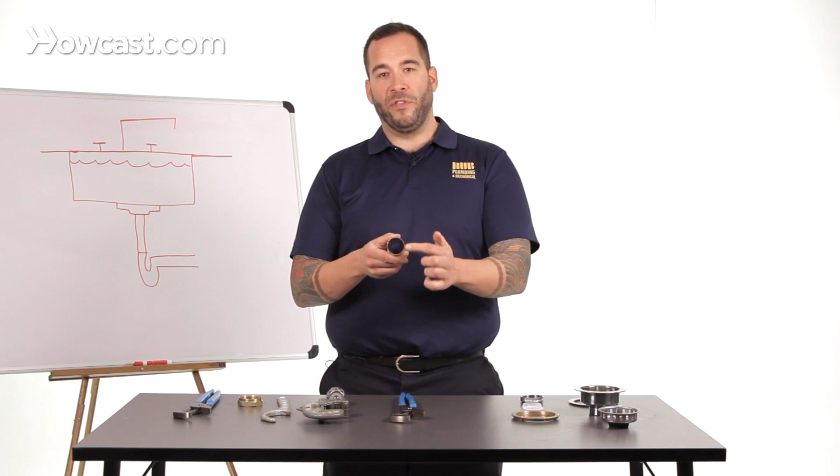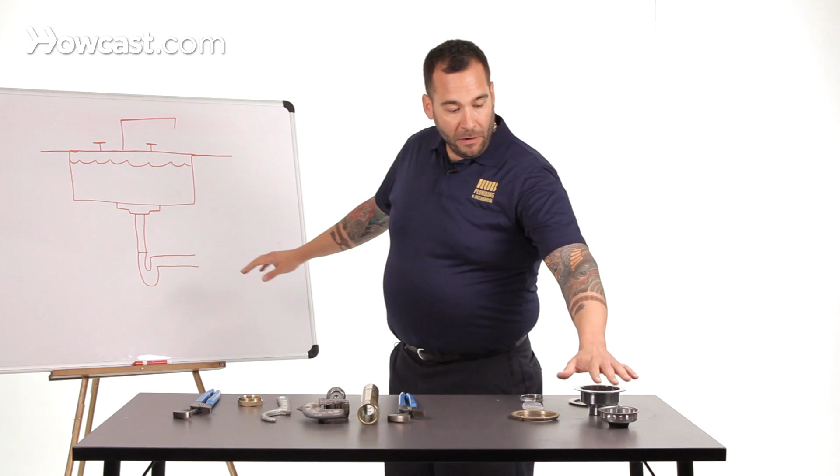This is called a tailpiece. In particular, this is a flanged tailpiece. You can see that flange, okay? Behind me is a sketch of a sink, all right? This item here is called a basket strainer. You've probably seen this in your own sink. This is the stopper that you use that catches all the food.

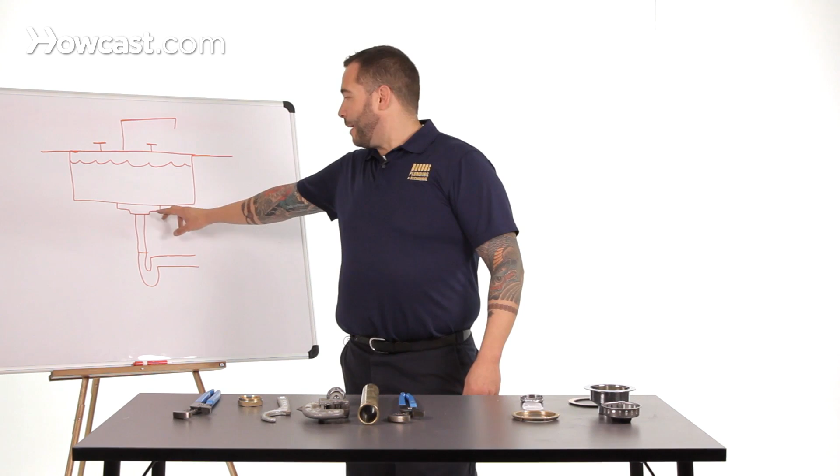And below that is the part that's permanently affixed to your sink, okay? This is the basket strainer itself. So for our purposes today, I've illustrated the basket strainer here, okay? This is the basket strainer, this assembly right here. And this, right there, is the tailpiece, okay?

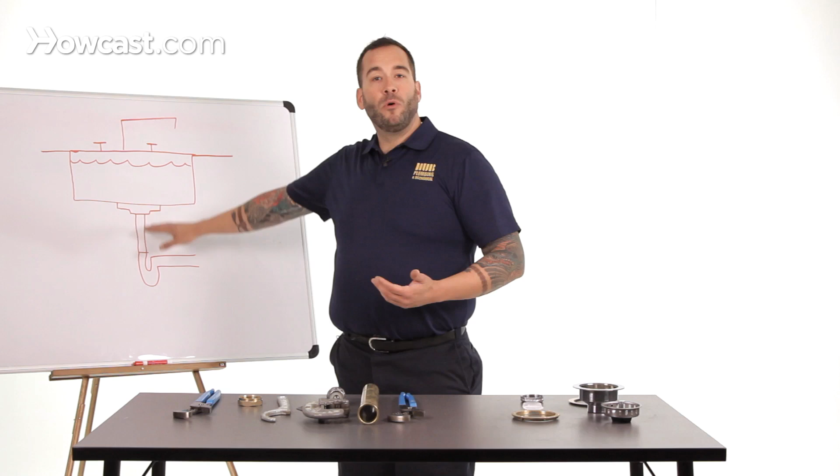So when you get a leak below your kitchen sink, you all of a sudden open the cabinets one day and there's water below. Most likely, this or some portion thereof has rotted out, cracked, decayed. It's time for it to go.

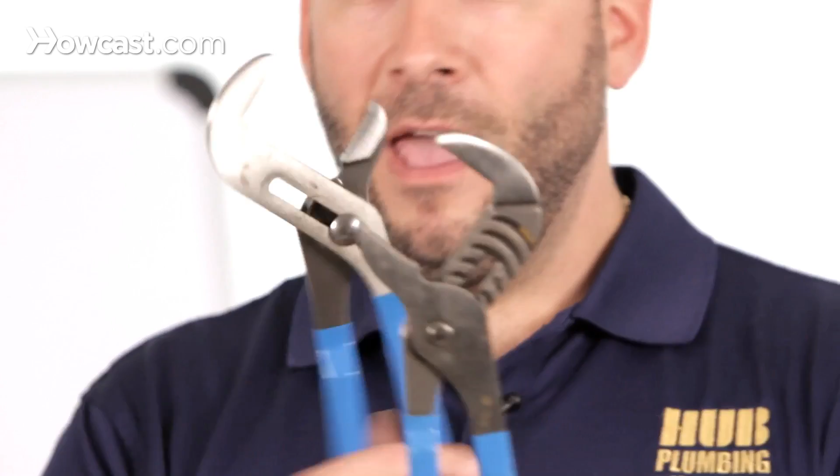So you need a few tools to get this done, okay? Once again, our channel locks. This time we want them with the teeth, okay? The reason I have two pair is so that in case I need to hold back, I can turn like so and gain torque that way. I'll demonstrate that in a moment.

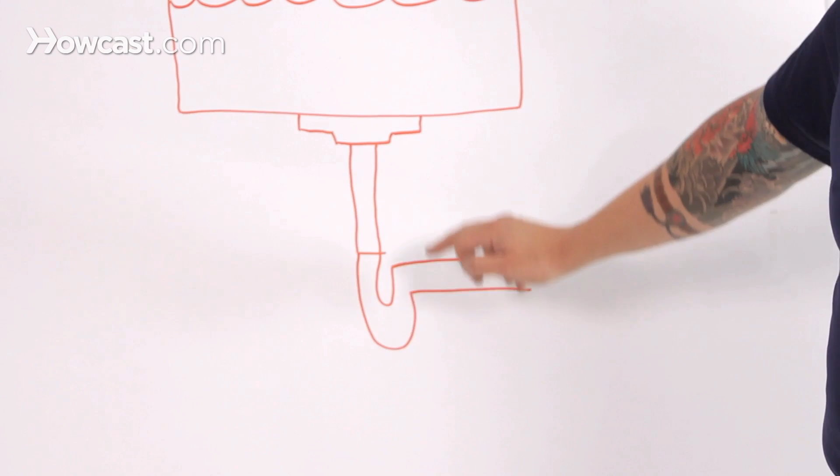The trap is that U-shaped piece of pipe right there under every kitchen sink, and if it's not under your sink, it should be under there because somebody did something wrong. The purpose of the trap is to keep water in that U, to trap everything in the sewer out in the sewer, things like flies, bad smells, and more dangerously, sewer gas.

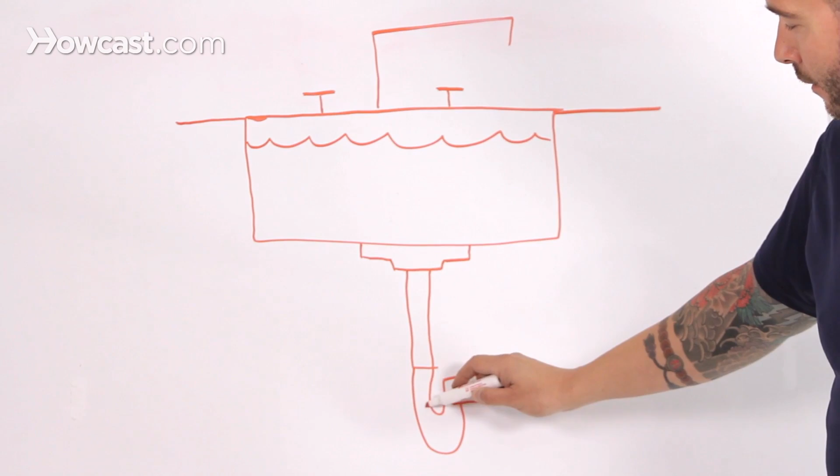Okay, so imagine the water level in the trap would be sitting right here. So when water goes down from the sink, it goes out into the drain and out into the sewer, but that little U-shaped piece of pipe, the trap, keeps a little bit of water there to keep everything on this side of it, okay, the street side we call it, out there.

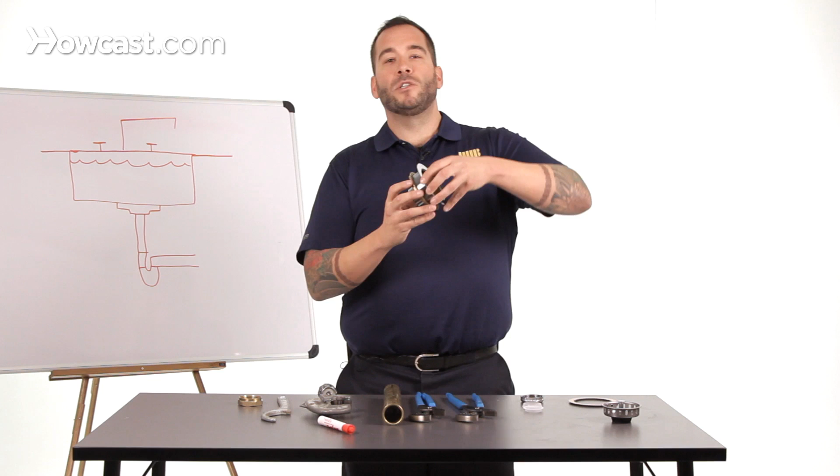Now, when removing a basket strainer from an existing sink, it can kind of get hairy. So imagine this basket strainer living in there for, I don't know, 15, 20 years. So we've got the nut that holds the assembly onto the sink like so, okay? With time, that nut can fuse on, and it gets really, really difficult to remove. So the only caveat there, you might have to hire a plumber, because we need to get in there with a saw and cut it out, and it can be a nightmare.

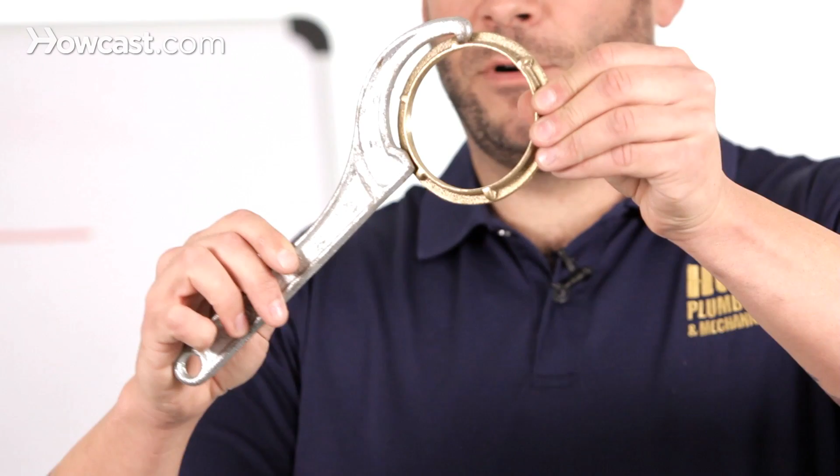If it's not, and most of them aren't, you can use this tool here. There's no other purpose for this tool in the world other than that brass nut on the bottom of the basket strainer. It is designed solely for this brass nut. It fits on like so. See the little nubs on that nut? It grabs perfectly, and you can turn that nut like this, okay?

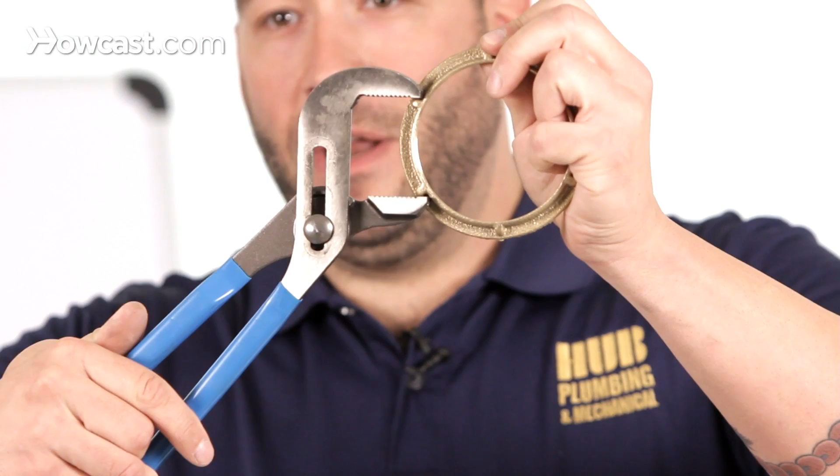This is essential. A lot of plumbers or homeowners, you can get the job done with the channel locks, but what you have to do, and it's a pain, is grab those two nubs, and then you get what I call the Knuckle Buster. It slips, boom, and you smash your knuckles between the channel locks, and then the next thing you do is throw them behind you, probably hit your wife or husband or whoever's behind you, and we have a bad day. So have the right tools for the job.

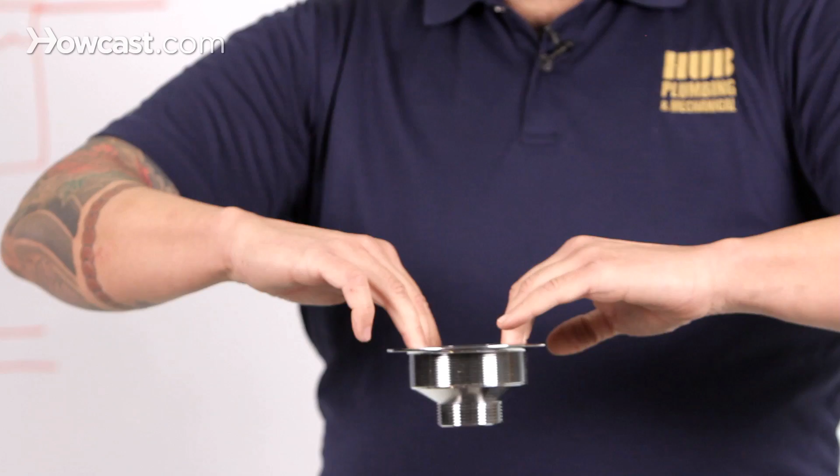Let's say we've got the basket strainer out, and now we're looking at a kitchen sink that's just a steel sink, and there's a hole there. What you're going to do is take this piece here, this collar, as we call it, put a roll of putty around that collar, and smush it down into the sink. That putty is going to kind of keep it there. Okay, now, our head would be up here above the countertop.

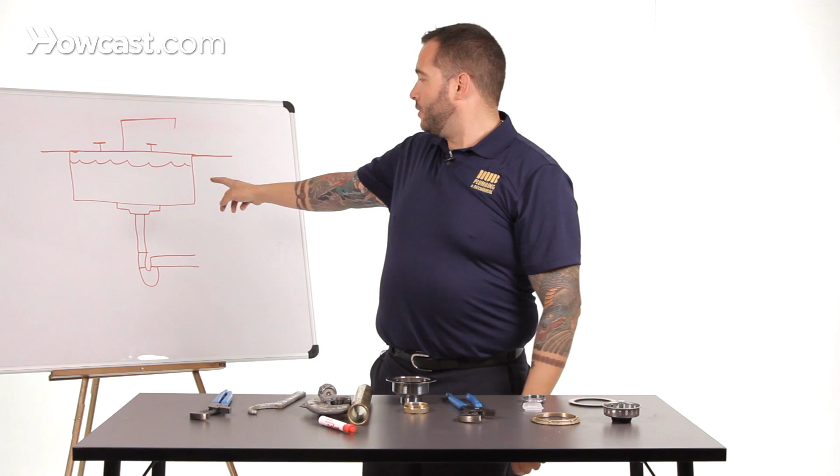We're going to go beneath. What you're going to see are these threads here, okay? If I'm going to refer to my drawing, now we've got this collar stuck down into the sink, and we see these threads down here. Now we can concentrate on putting the basket strainer assembly together.

So from under the sink, we're looking at these threads. Your drainage assembly will come with these two gaskets. One is a cardboard gasket. The other is a rubber gasket. The rubber gasket is what makes a watertight seal. The cardboard simply kind of holds it in place. So you would, again, looking at these threads underneath, put these up like so.

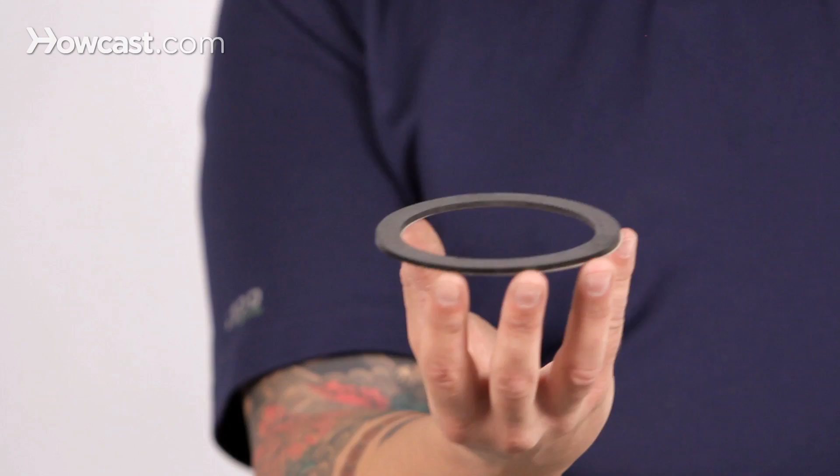Then you're going to take your brass nut, this wide brass nut, this retaining nut. You thread the brass nut on. You can do this by hand for a while, and then you're going to get down to the business end of things, and you're going to start building up torque, okay? When you start building up torque and you can no longer turn it with your hand,

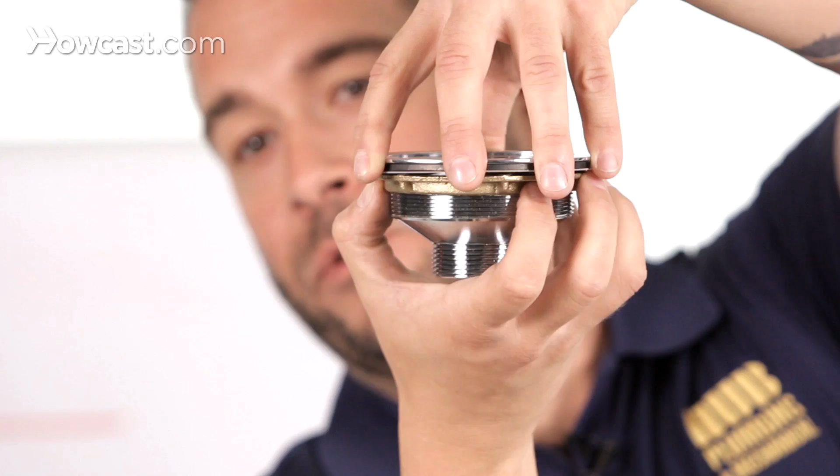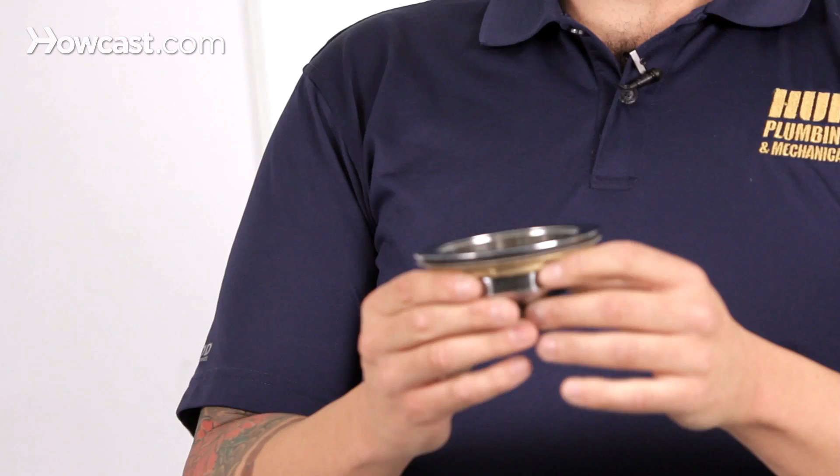you get on it with this strainer nut wrench, and with quick jerky movements, I'm going to turn to the side so you can see. This would be you looking underneath the sink straight up, okay? You kind of get on it, turn, and it's going to build up torque, and you're going to be able to feel this whole assembly kind of snug down to the sink, okay? Again, with the steel of the sink being between these gaskets and this top chrome collar piece.

All right, very simple, very, very simple. You can save yourself a lot of money by doing this yourself. So now we've got our basket strainer assembly on the sink. It's solid, it's in place, okay? Now this is all brand new, there's nothing leaking.

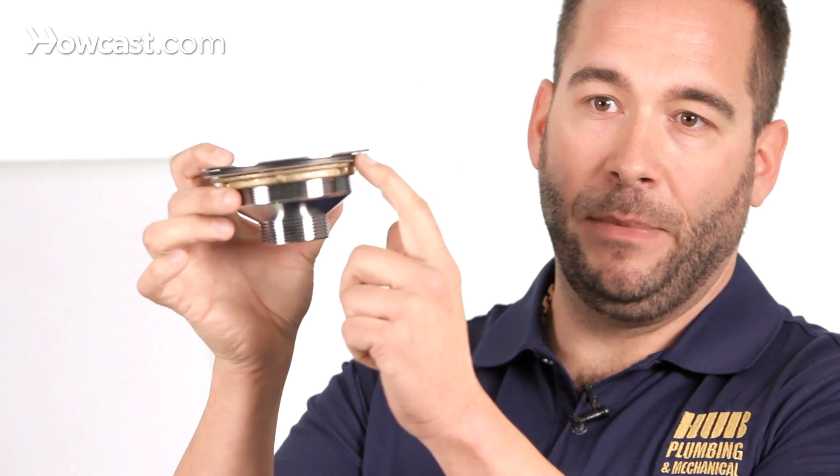See, this is a common leak because there's a rubber gasket here that wears out. Now, you will have taken this out because this is the most common culprit. It rots through and it's very, very thin, and when it gets old, you can actually just kind of crush it like a soda can. There are a couple of nuts that attach this to both the basket strainer and your trap. This is called a slip nut, a brass slip nut.

You can see real cheap ones at the supply houses and stuff, but this is probably about $6. This nut, this heavy-duty brass one, won't dent, and it'll be there long after you and I are gone, most likely. So this nut here would go over that flange tailpiece. Again, what stops this from sliding straight out is the flange. This is what's going to attach underneath the sink to the threads remaining on that basket strainer.

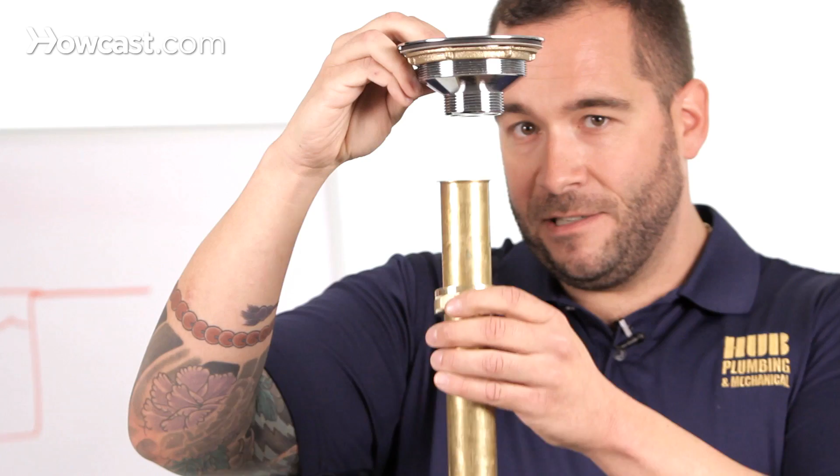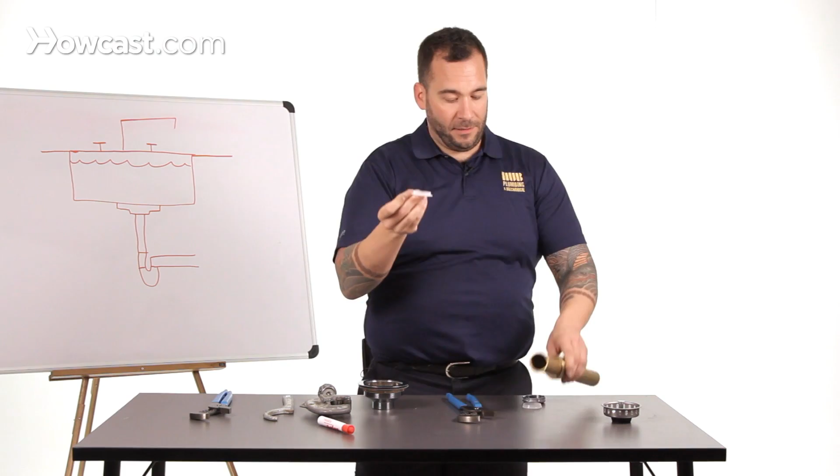Your flange goes straight up and meets. As you can see, it's the same size, okay? But, this is critical, you have to put this special little gasket in. Generally speaking, this gasket is called a top hat gasket because it looks like a top hat, if you can see that, okay? Looks like a top hat that you'd wear. This is designed to sit right in there, okay? As you can see, it won't fall out.

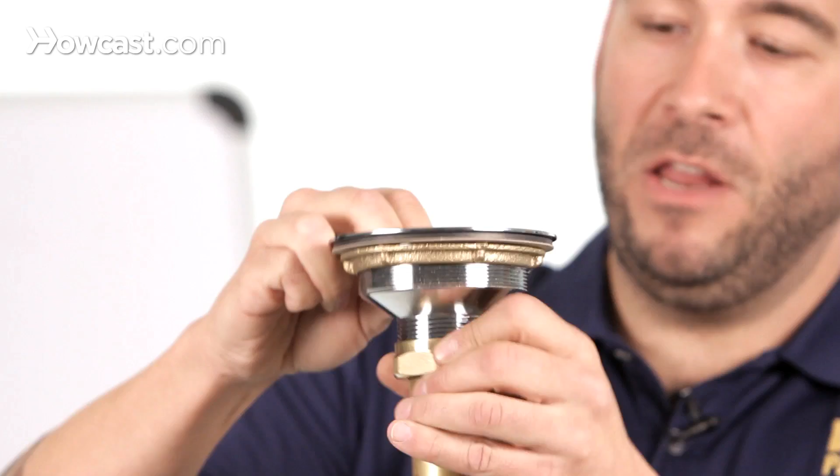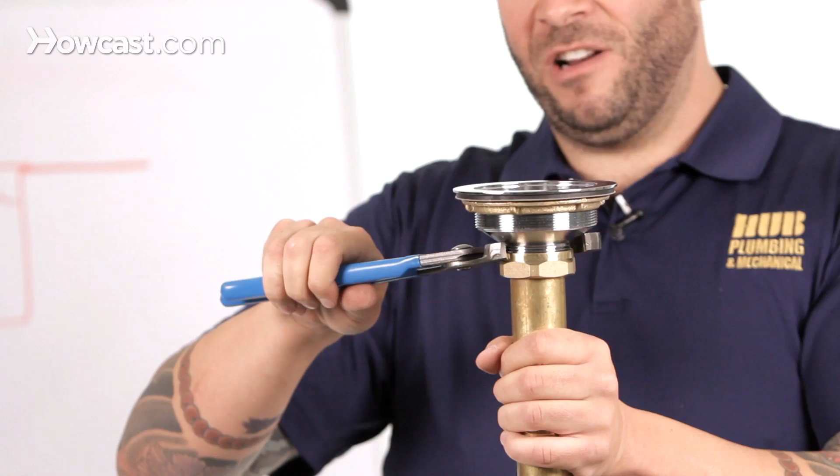And this is what makes the watertight seal, because if you put metal to metal, it's gonna leak. All right, it's not enough of a seal. This, as it compresses, you can just kind of screw that on, and you can feel it snug down, and it stops. You only really have to do this hand tight, but just for safety's sake, I'll give it another snug with the channel locks, and it's down. But now you've got a watertight seal here.

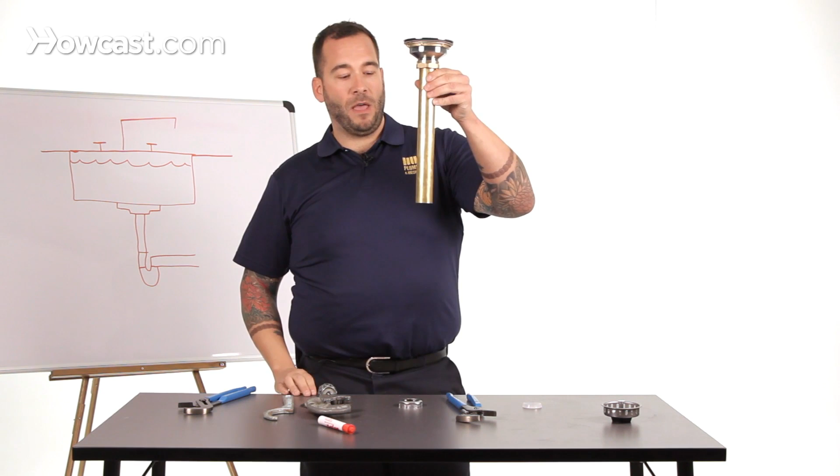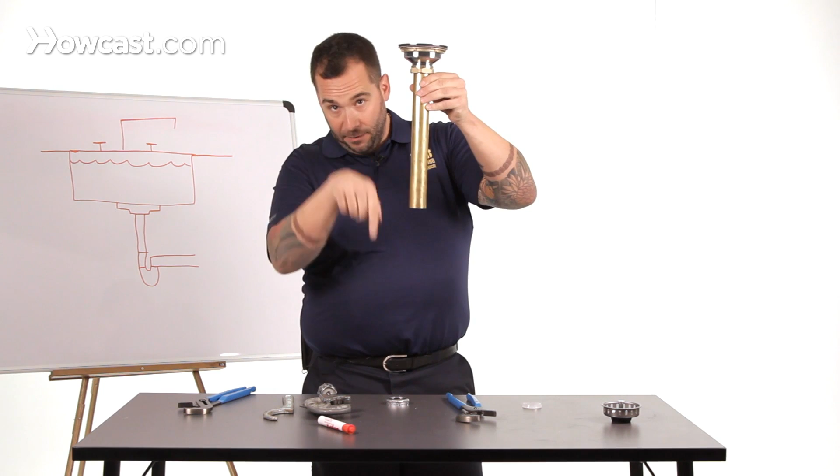The last thing that you have to worry about is the nut going down to your trap. So again, we've got a fully assembled sink now, okay? Generally speaking, we've got a trap, that U-shaped piece of pipe right here, okay? And on the trap, that's what we call the inlet, where the water goes in, this being the outlet, okay? On the inlet of that trap, there will be threads.

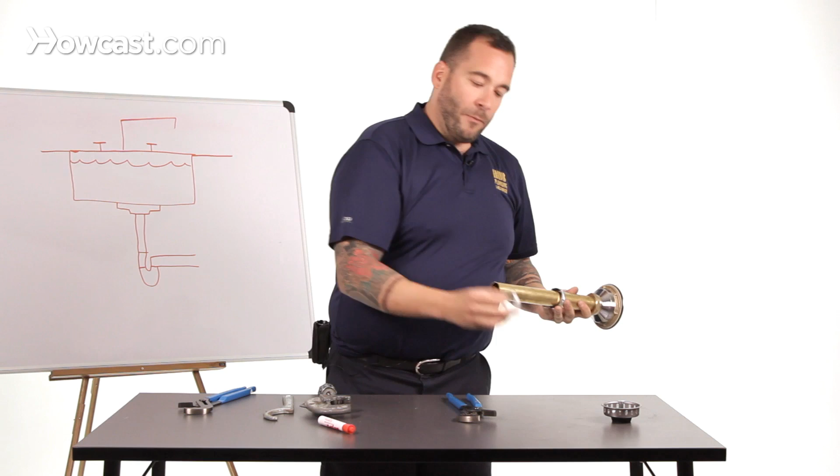And it's exactly the same type of nut, just a different finish. Goes over. And then we use a slightly different gasket. This is called a beveled slip nut gasket. Once slipped over this tailpiece, this nut is going to compress it down to the threads on the inlet of the trap, and again, create a watertight seal. And that's how you fix a kitchen sink drain.